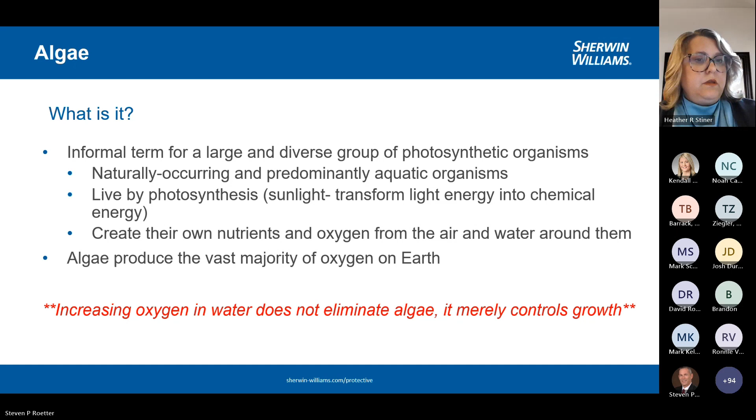Okay, so I already brought up how it needs light to grow and build up its energy, but there's other key things that help the algae to grow or cause it to stunt its growth. So nitrogen and phosphorus are nutrients that are helpful in the growth of algae, and they play a pretty crucial role in how much it grows and how much is produced. So being able to control the amount of nitrogen and phosphorus that goes into the treatment process or the water process is helpful. Low oxygen in the water can also help the algae to grow as well.

And then light and temperature are equally significant factors in the growth process. Algae will thrive in environments, obviously, with optimal light intensity, and also, the longer that it's daylight, the better.

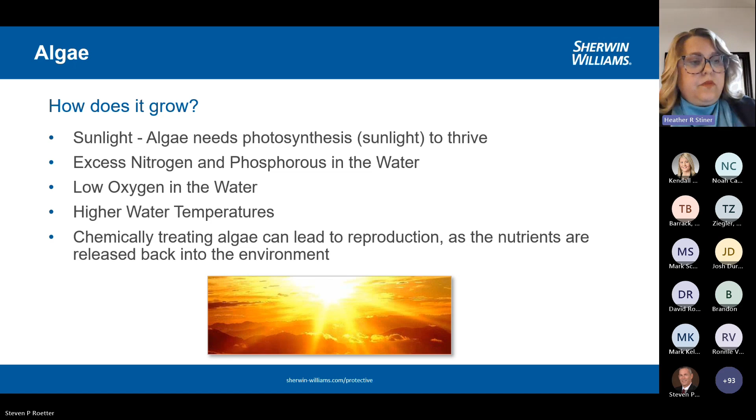So like I said on the previous slide, there are harmful effects with algae. When algae builds up, it can cause blockage or reduction in the flow in the weirs, pipes, influents, effluents. I do want to point out that for the purpose of this presentation, we are talking about blue-green algae, and that algae can build up in water treatment or wastewater treatment. But the solutions we're going to be talking about today deal with polysiloxane coatings, which are not NSF approved. So we're going to be focusing mainly on wastewater treatment plants.

And then, Steve, sorry, can you go back? It's getting away from me here. That's okay. Yeah. Were we here?

Yeah. So whenever you get that buildup of growth, it's kind of a domino effect, because the buildup of growth is going to cause a reduction in the efficiency of how those parts of the plant are working. And then it also creates more sludge and disposal. And in the end, that's going to create an overall additional cost for operation of the plant. So there's a lot of benefits to being able to slow down the algae growth or come up with unique ways to control it. Go ahead, next slide.

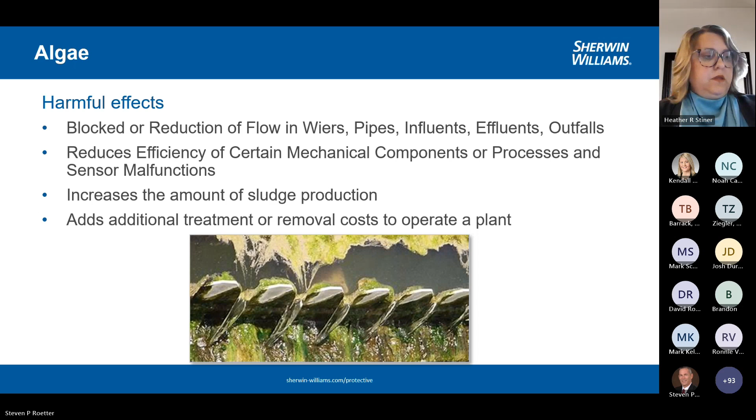Harmful effects. On this slide, I'm going to talk about how it can affect the consumer in regards to poor water clarity. It can cause an odor that at times can almost make someone nauseated. And it can impact the water taste and quality in the water treatment process. But like I said, we want to point out that these are factors with algae growth on the water treatment side. However, today's presentation is going to focus on the wastewater side, mainly because the coating we'll be talking about is not NSF approved. So with that, I'm going to pass it back over to Steve, and he's going to talk a little bit about a study that we did.

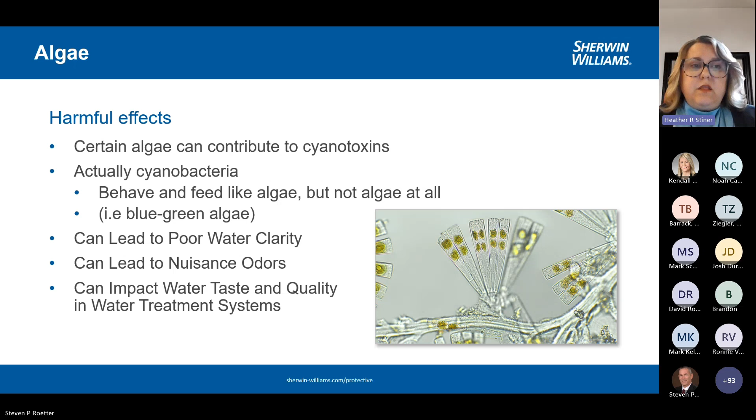Yeah, so we had seen for a number of years that the polysiloxanes had a lot of characteristics of foul release coatings that are used in the marine industry. And there was a lot of anecdotal evidence that using this coating, especially in clarifier launders, doesn't stop the algae from growing, but it made it easier to clean off. Whereas owners were finding they had to go in with a pressure washer and spend a day and a half cleaning the walls of the launders, with the polysiloxane coating they could go in with just regular garden hose pressure and clean it off in an hour or two. So it significantly reduced the effort required to clean the algae off the walls.

So we saw this anecdotal evidence, and we decided to do a little internal study to figure out why it worked, to validate it, so that if we made any claims, we could back them up. So we got an owner to participate, and we went into the clarifier and sampled the algae growing there, first of all to find out what kind of algae was in there. And we found exactly what we expected to find, which was basically three different types.

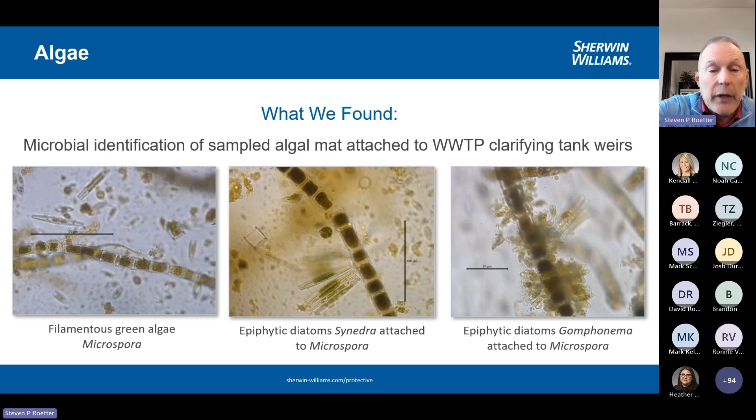It was dominated by what they call filamentous green algae of the genus Microspora. I know that doesn't mean anything to anybody. Means very little to me as well. That is the kind of algae that forms into long strands, right?

There were two major other ones present, which are diatoms, which are algae that just form into cells and float around in the water. But interestingly enough, what they do is they attach on to the filamentous algae, and they bulk it up, compete for the sunlight and the nutrients, and make the bulk of the algae what it is and what causes the problems.

A lot of times, these groups of algae will break off. They'll clog up pumps. They have destroyed pumps at times, clogs the system up, and reduces the efficiency of the treatment system. So we found exactly what we expected to see.

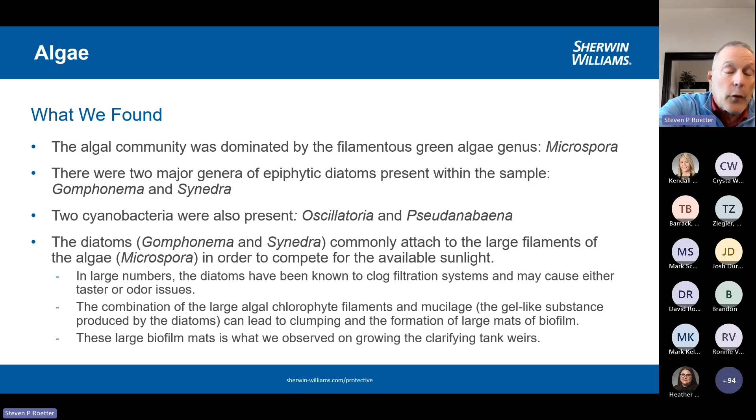We also found the cyanobacteria that was mentioned, which are not really algae, but they look like algae, but they actually put off byproducts, sometimes poisonous, sometimes cause taste and odor problems in potable water systems. This, unfortunately, our solution won't work for potable water.

So currently, if you're an owner, you already know this as well. There are several systems, methods that they currently use to try to control the growth of the algae. One is a brush system, where they attach brushes to the mechanisms that push up against the wall of the launder or the wall of the clarifier, and as the mechanisms spin around the clarifier, it cleans off the surface as it goes.

These are effective, but they're an additional cost and additional maintenance issue, and they can actually lead to erosion of the coating and the structure over time, because that slow movement over time will cause erosion of the coating, and then of the concrete below it if there's no coating.

There's a number of chemicals that they can dump in that can kill the algae. They have found sometimes that actually promotes the growth of the cyanobacteria because it limits the competition for the sunlight and the nutrients. So you take care of one problem and another one comes behind it to flourish.

It can also throw off the system by adding chemicals to the treatment process that aren't accounted for in the treatment system. Some of them would have to be removed before just discharging the water. Manual cleaning and removal, that's this process that we help with the coating. Aeration, baffles, filtering, it can help to control the growth, but it won't prevent the growth of the algae.

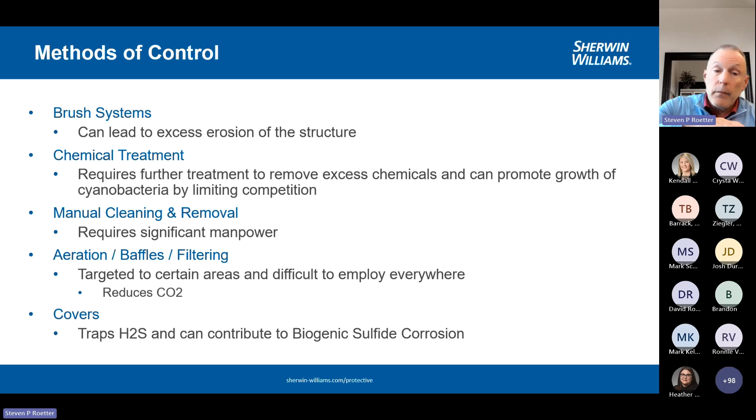Covers are expensive, and one of the big problems is if this is an area where you have hydrogen sulfide still dissolved in the waste flow, this H2S can be contained by the covers, concentrating it and leading to worse biogenic sulfide corrosion of the concrete. So all of them effective to a certain level. All of them have their own drawbacks, right?

The advantages that we have found working with owners for an algae release coating or a bio release coating is that the targeted solution can be used in most of the processes in wastewater where algae growth is an issue. It doesn't require any additional treatment or chemicals. Reduces the manpower required to deal with this algae problem. And I've got a short little video to show you how that works. It's an easy solution, minimal upfront cost.

And one of the additional things is that this coat of paint actually adds additional corrosion protection to the surfaces that it's applied to. The polysiloxane is sort of a hybrid between a polyurethane and an epoxy. So it has barrier protection and it has color and gloss retention. Color and gloss really isn't a critical issue inside of a wastewater treatment plant, but most of the coatings that we use for barrier protection, epoxies, are not UV stable.

In other words, the UV light will over time break them down in chalk and they'll eventually disappear. You lose about 1 mil a year of epoxy in direct sunlight. So what this polysiloxane does is it protects that underlying epoxy from the effects of the sun, and it will actually significantly extend the life cycle of the coating.

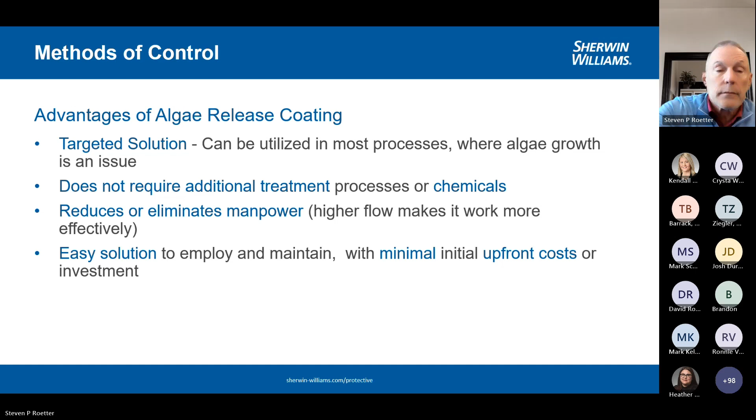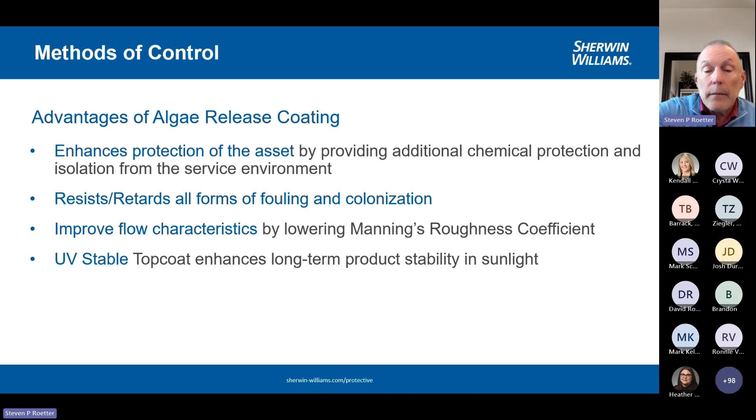Yep, and I just said most of that before I got to the slide. So it again enhances protection of the asset. One thing I didn't mention, it can improve the flow characteristics because of its smoothness and its low surface energy. It can enhance the flow characteristics of whatever facility it's put into. And this is some of the anecdotal evidence that we saw early on.

It works really well on the outsides of water tanks to reduce the buildup of the biologic growth from the condensation, the sweating on the exterior of the tank, and dirt buildup as well. It becomes self-cleaning from the rain.

And this is one of the pilot projects we did to kind of demonstrate how easy the algae is to clean from the polysiloxane.

Let me see. Shout out to Annie Hoagland for uploading that to YouTube for us.

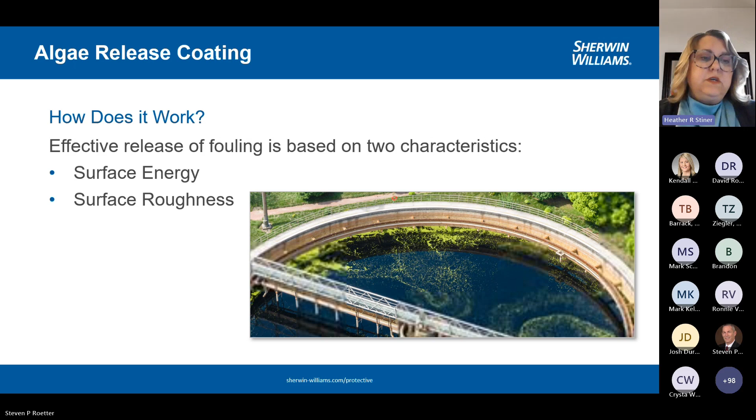So the main coating systems that we looked at in the study were Sherloxane 800, which is our polysiloxane. And then we did look at a competitor's version of polysiloxane, and for the purpose of this presentation, we'll refer to that as polysiloxane B. And then we pulled the workhorse coating that we use a lot in the wastewater side of the business and looked at an amine epoxy. And then we also looked at your typical polyurethane that you would apply in the wastewater market as well. For this study, it was an aromatic polyurethane.

And then on the marine side of the business with ships, you know that they develop coatings that are what we call foul release coatings. Those are put on the undersides of the ships so that barnacles and whatnot, whenever they try to attach in the water, these coatings are developed to not allow that attachment to happen. So we decided to look at that in this study as well.

And this specific developmental coating was using a binder that we term PDMS, which stands for polydimethylsiloxane. And that type of binder is what they call super hydrophobic. Hydrophobic just means it doesn't like water. So if you have the super in front of there, then it really doesn't like water. So the next slide is going to show.

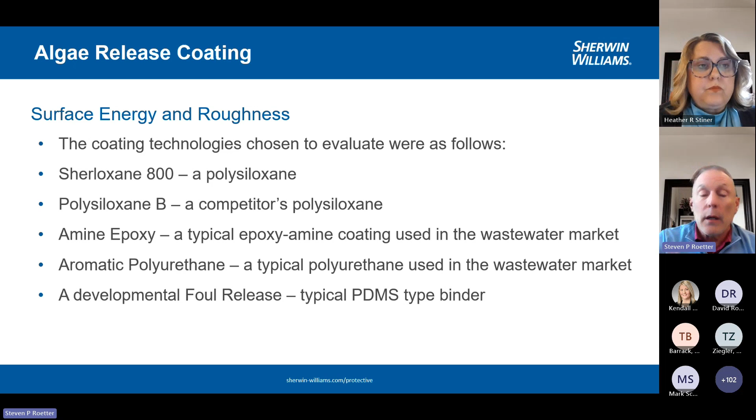If you look at the amine epoxy, it's the one that actually has the lowest angle. And that's not, in my opinion, a big surprise. And then the polyurethane didn't quite hit the mark either. I don't know if Steve, you have anything you want to add? Yeah.

So, these are water droplets on the coating surface, and the coating surface is not weathered, right? So over time, your epoxy surface is probably going to get worse than what it is right there because it's going to weather. It's going to chalk from the UV radiation. So you can see that the epoxy surface and even the polyurethane have no chance whatsoever of being an effective foul release. That's why the algae is able to so tenaciously hold on to those coatings and it's so difficult to remove.

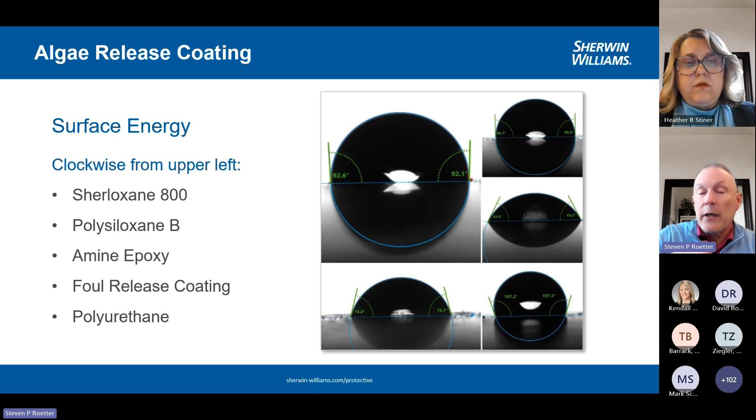And if you look at this, it's showing you how the surface energy actually relates to the static angle degree. So, yep. So, it's not a huge surprise that the foul release coating is getting the best results. And then you're looking at the polysiloxanes coming next. Right. And the curve that they look at here, I can't remember what it's called, but it's not linear, right? So in other words, 20 isn't twice as good as 40.

What the people that deal with foul release coatings find is that a coating becomes an effective foul release coating when it gets to the 20 to 30. I don't remember what the units are on that. When the surface energy is between 20 and 30, it becomes a really effective foul release coating. You don't get a ton of benefit going way lower than that. And if you're above that, it's way worse.

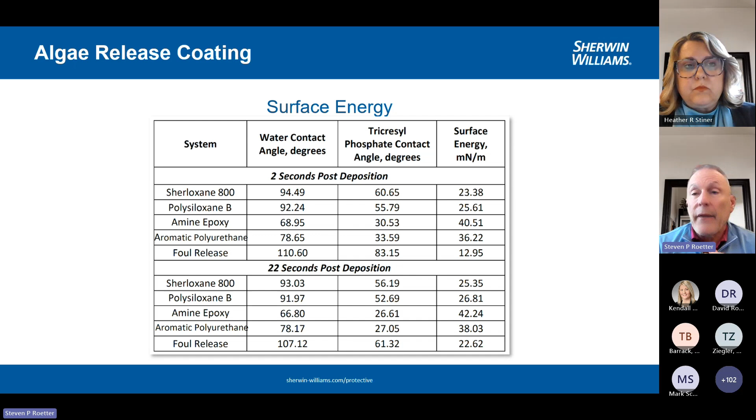So you can see that the polysiloxanes both fall well within that 20 to 30 range. The people that deal with this stuff call that a really, really effective foul release coating. Very close to the single purpose foul release coating that's under development that was 22.62. So we were a little bit surprised to find that, but pleased nonetheless.

Right. And keep this roughness, smoothness in mind, because if you are interested in using the polysiloxanes for foul release in any of the structures, we have to write a specification to make sure it's put on as smoothly as possible.

Typically, these are going to be concrete. If they're steel, it's a little easier. But if you've got a concrete surface, we're going to want to do a resurfacing to get the concrete smooth. Use an epoxy undercoat again to get it as smooth as possible.

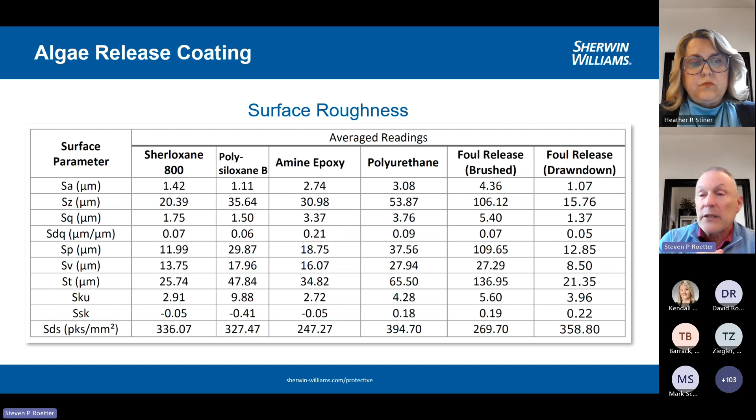So we would recommend spraying the polysiloxane on in the launders over epoxy, which is over a resurfaced concrete surface, to get it as smooth as physically possible, to be as effective for as long a period of time as they can.

We got a couple of things here. This is a fairly new one, so the results of this are going to be ongoing. But we did a launder in a clarifier in Hilton Head, South Carolina. This is the spec that we used here. They did a CSP 3 to 5 on the concrete, which is fairly rough.

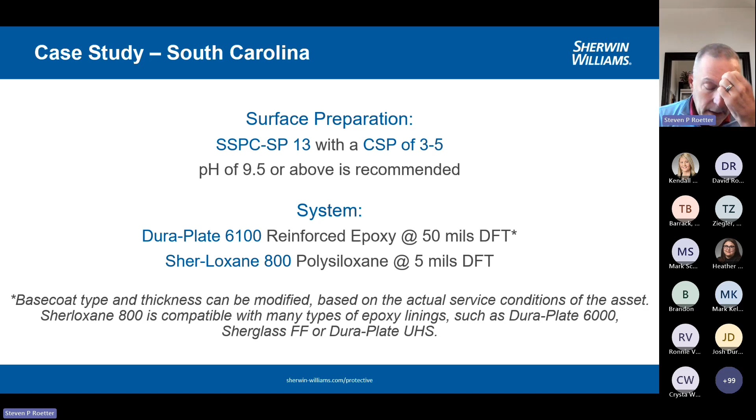So then we put Dura-Plate 6100, which is a plural applied epoxy, at 50 mils to smooth it out, and then the Sherloxane 800 over it at 5 mils. But there's a wide range of undercoats and surface preps that we can do to make it as effective as possible. They did resurfacer with just microsilica mortar. That's kind of what it looked like after the fact there.

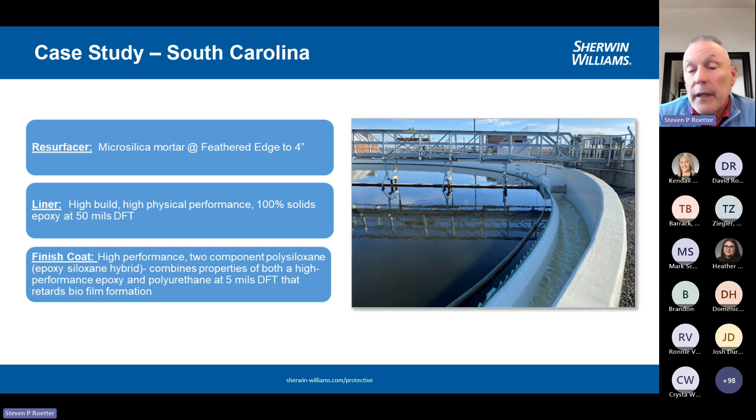We don't have a long history; this is going to be ongoing. This is a fairly recent one within the last year. It so far has reduced the amount of time required to clean the algae from the launders, but we'll be interested in seeing how this works out long term.

And Heather? Yep. So then the final case study that we're going to talk about is one that was actually initiated and performed in 2020. So we have 4 years of this in service. And it was a chlorine contact basin where we applied a Dura-Plate 6000 reinforced epoxy at a high build of 60 mils dry film thickness. And then we top coated it with Sherloxane 800, which would be the polysiloxane, at 4 to 6 mils DFT.

And then the third party folks that we worked with on this were RFI Consultants, LLC, and Wilson Engineers. So basically in this project, what we did is took a 10 foot by 30 foot section in the chlorine contact basin, and applied this system to it with the Sherloxane 800 as the top coat. And then we went back in to see how much the algae was holding on to the actual coating system, and then how easy it was to clean it.

So Steve, if you could go to the next slide. So this is showing you a section of those 10 foot by 30 foot areas that I was referring to. And if you look at where the black arrow is, it is showing you where they cleaned the surface simply by using water and lightly rubbing it with their finger.

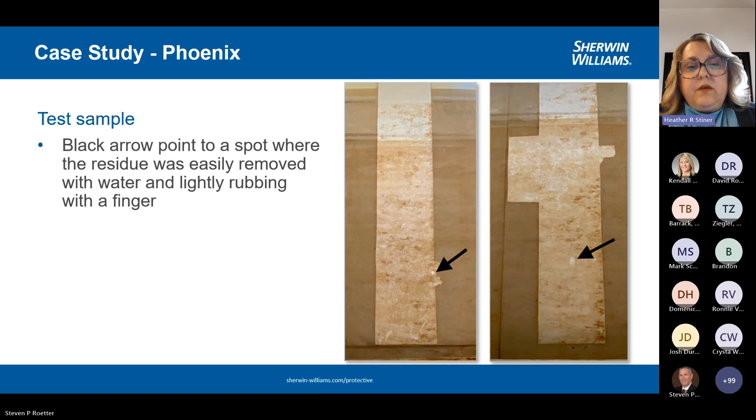And you can also see when you look at these photos that the amount of algae that was attaching onto these sections was a great deal less than what you're seeing on either side of it, indicating that the coating is actually working as we wanted it to, as an algae release type coating. Next slide.

Yeah, Heather, oh, go ahead. No, I'm sorry. Go ahead. Oh, I was just going to add that we did follow up recently with the folks that did this work, and they said that it is still working well after 4 years.

Yeah, go ahead, I was just going to give Bob Murphy a shout out. I think I saw him on the webinar here, for initiating this project. And Bob retired from Sherwin, what, about 5 years ago? So if you're on here, Bob, shout out to you.

So this was some quotes we got in regards to the owners and the observations of the actual report.

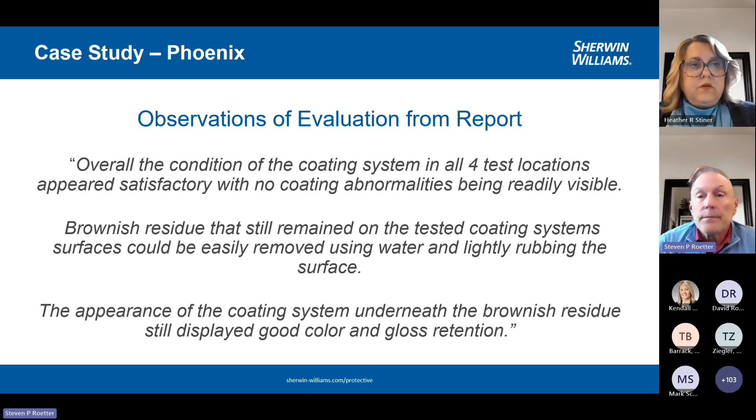That's really all we have prepared for this webinar. It's a fairly simple subject. If this is something anyone's interested in, all you have to do is contact us, your local rep, your PDM, your BDR, whoever you're in regular contact with, and we can help you develop a plan and a specification to give it a try and see if it solves your algae problem.